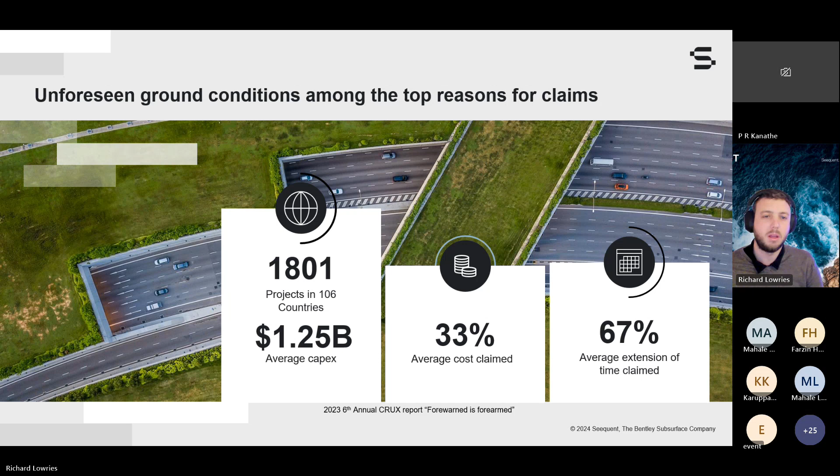The hidden nature of the subsurface and the limited availability of site investigation data, combined with uncertainty of what lies between the data points we do have, is one of the key challenges facing geoprofessionals working on infrastructure projects. Not only do they need to understand the underground and identify ground risks with the limited data they have access to, but they also need to communicate this information to a wide range of different disciplines, both technical and non-technical. All of this is commonly done on tight budgets and timelines.

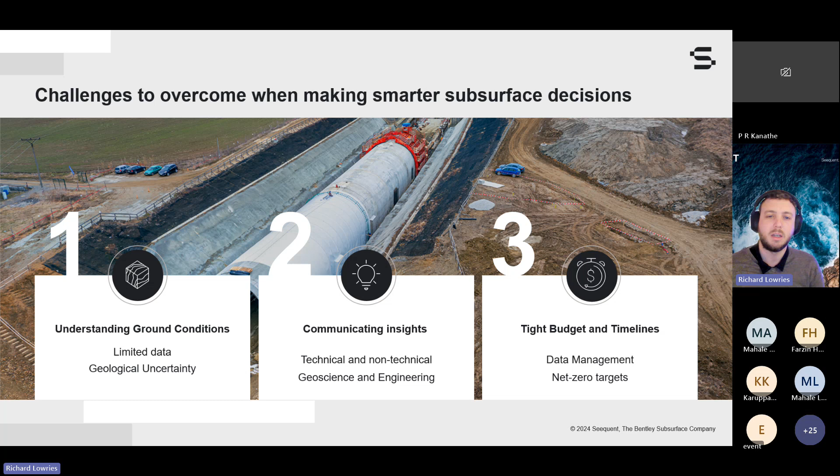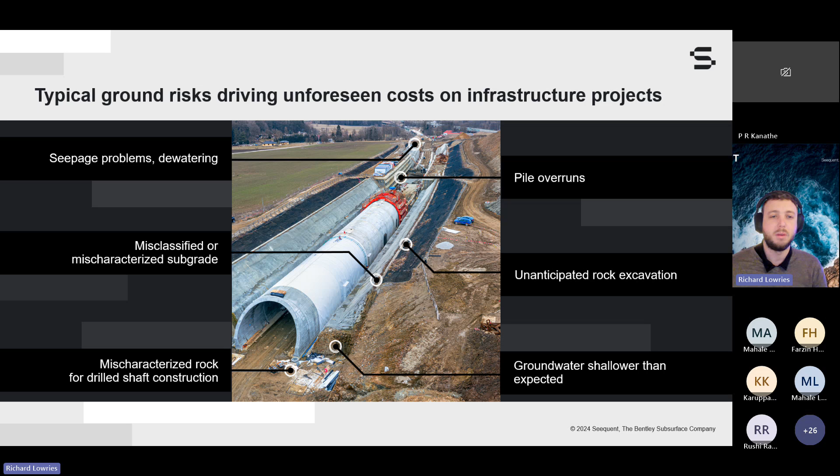I'm sure a lot of you have come across most of these unforeseen costs that occur on infrastructure projects, from seepage problems when we're doing dewatering, pile overruns, misclassified or mischaracterized subgrade, unanticipated rock excavations, and maybe groundwater shallower than expected. And these are typical problems that we commonly come across when we're working on these kinds of projects.

So in today's webinar, we're going to go through 3 sections. The first section is on existing trends. The second section is looking at some case studies that explore some of those existing trends. And the third one is digital technologies that people might want to be using or how they could be embraced. So I'm going to start with existing trends as section 1.

So we're seeing trends of moving towards the adoption of digital technologies. More and more geoscientists and engineers are using technologies regularly across their projects, whether that is through digital collection of site investigation information or through the production of digital drawings. This is helping to increase efficiencies across projects. There's also an increased trend to machine learning and generative AI. This adoption is requiring more and more people to use and manage structured data.

And when we talk about structured data, we mean information that is stored in a structured way and not stored in, say, PDFs or in cross-sections or reports. So if we're looking to continue to extract more and more insights from this information, we cannot continue to break the transfer of digital data between different parties working on projects by only providing PDF reports or only boreholes. This requires an increase in time to work on these projects, to work with this information.

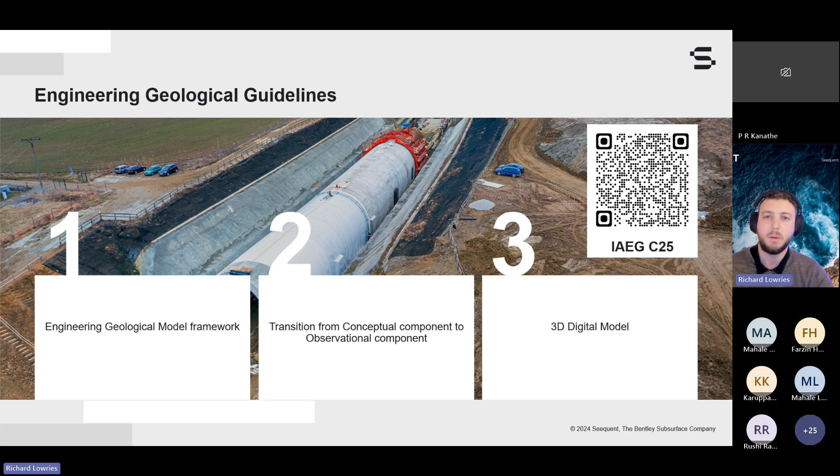I'm going to just quickly apologize because the first video is quite a salesy video. I don't mean it to be a salesy video. It's just got quite an interesting case study. So if it's too salesy, then I understand. But we're trying to keep this talk on a technical level. But I just wanted to raise it before I show it.

But anyway, the high-speed line between Gelnhausen and Fulda, the railway line in Germany, was a project that was run by Professor Quick und Kollegen. It's a high-speed line that will be up to 240 kilometers per hour and will accommodate an expected 30% more passengers by 2030. Two thirds of the approximately 100-kilometer investigated route options run in tunnels. The longest tunnel, between Schultern and Micheltenbach, runs a distance of 9.5 kilometers. There were over 100 boreholes explored, 15 lithological layers created, including quite a complex fault system of 88 fault blocks.

I'm just going to play the video. Let me know if you can't hear it. Richard, sorry to interrupt, but we are not able to hear the audio. You can't hear the audio? No, I can hear it. Yeah, I'm also able to hear it, Richard. Okay. I'm also hearing it. Cool. Well, I'll continue with it, and then I will just talk through what's said on it, just for those that can't hear it.

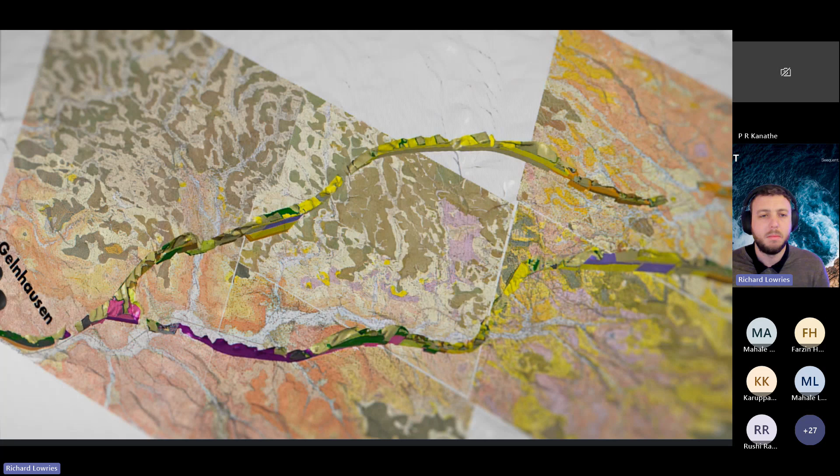This is similar to another project that we have here, and this is the Karavanke Tunnel connecting Slovenia and Austria. It started with an existing single tube tunnel, and that did not meet the demands for the current traffic flow. So a second tube was drilled parallel to the existing one. The length of the new tunnel was approximately 8 kilometers.

This one doesn't have any sound, so I'll talk over it while it plays. This site had some very significant complex geological challenges, and we can see here in the screen in front of us that we have a complex geological map that has been generated for the project area.

And what they're looking to understand on this project is some major water inflow was happening on this project, and trying to identify where that could be as part of the tunneling process. They were also looking to reduce the overbreaks, and there was a risk of methane ingress. Around 25% of the total tunnel route had a risk of high water inflow.

And we can see here we're going to go from a 2D representation of the geology into a 3D geological model. This is built from a combination of data sets. So here we can see we have these big faults. This is built from the geological map and the borehole information that we can see just in the scene as part of the model. So building a representation of those fault planes to help understand where that groundwater ingress would be happening.

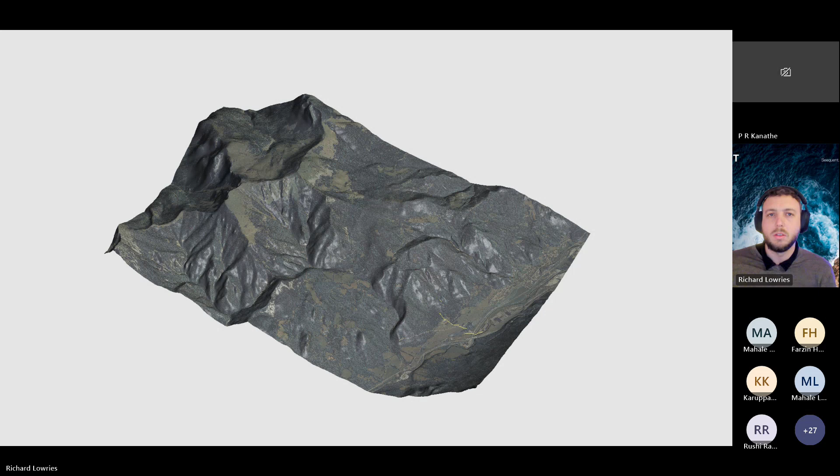So this is another tunnel project, another 3D model. This one is in Auckland. This is City Rail Link, and it's in New Zealand. It's a project by Aurecon. This project is really interesting because the other two were being built during construction. This is for a different phase of the project.

This is for tender. And so this is for the client side, so looking to build a model that communicated the project risk to anyone that was tendering on that project. So for detail, the City Rail Link project is a twin 3.5 kilometer long rail tunnel connecting an existing station to new stations. Also, 2 new stations were going to be added along that route.

It was managed by the City Rail Link, a joint venture between Auckland City Council and central government. The project commenced in 2010 under construction via 6 contracts, and it transverses weak rock of a geological group called the Waitemata and cuts through the Pleistocene alluvial deposits and some really complex volcanic deposits as well.

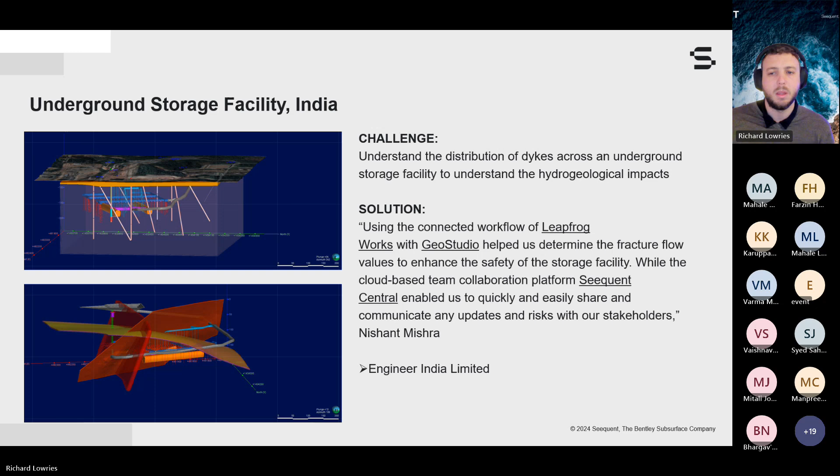For this final case study, I'm just going to hand over to Dr. Farzin Hamidi. Farzin, are you able to take over? Thanks, Richard. Can you hear me? Yeah, I can hear you.

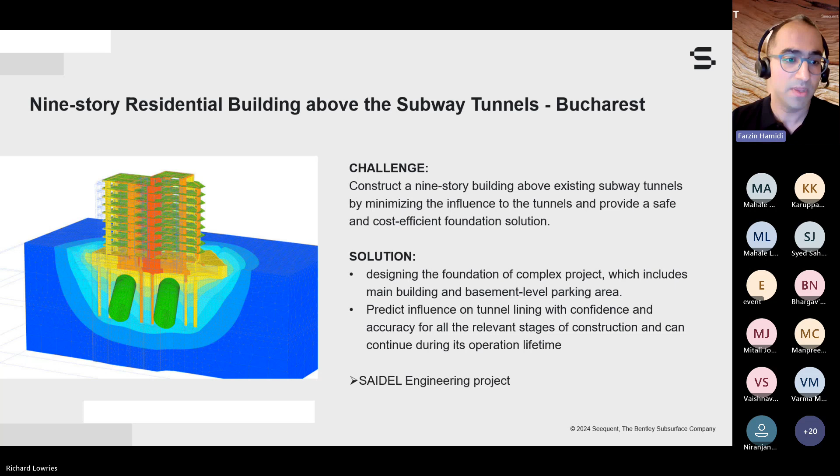And also it helps them to decide to reduce the number of floors, which originally was decided to be a 10-story building; they decided to reduce it to 9 by minimizing the seismic load on the tunnel. And also the reduction of the raft thickness from 2 meters to 1.5 meters, which actually saves them money. So these are all designed in this specific case study, and you can actually find it in this case study. Would you please go to the next slide, Richard, please?

In this section, we will highlight the importance of digital technology. Next, please. File-based exchange and incompatibility or transition of a file format is still a daily issue for many engineering firms. Click next, please. Our own geoscience data report in 2021 revealed that a third of geoengineers are spending over 30% of their time managing data. That adds up to a significant impact on our productivity.

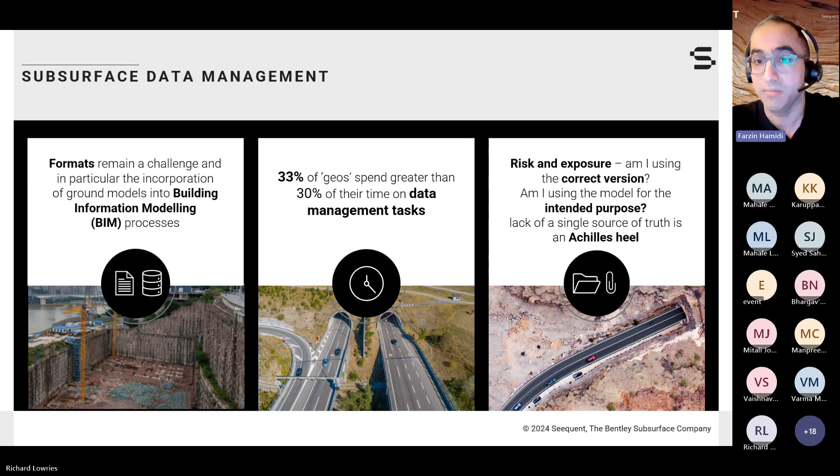But more importantly, perhaps, is the opportunity cost of devoting that time to non-value-add tasks. It leaves less time for what really matters for a geotech engineer. So if you spend, let's say, 30% of your time mainly on file transfer, you spend less time doing whatever you're supposed to do. Ultimately, if you do have challenges, the risks it can open are quite significant, and the cost of getting something wrong when you could have got it right can make or break a project. That's what we're actually thinking within Seequent. Next slide, please.

Ultimately, our vision is to enable more productive and streamlined workflows that connect the people on the project and enable them to collaborate while delivering the pieces of the puzzle that they are responsible for. A centralized and intelligent model with dynamic change management would not only save time by automating deliverable production and preventing rework and delay, but also mitigate the risk from the early stage of design. This fits our ability to execute value engineering opportunities and so add value to infrastructure through a better understanding of ground conditions. Next, please.

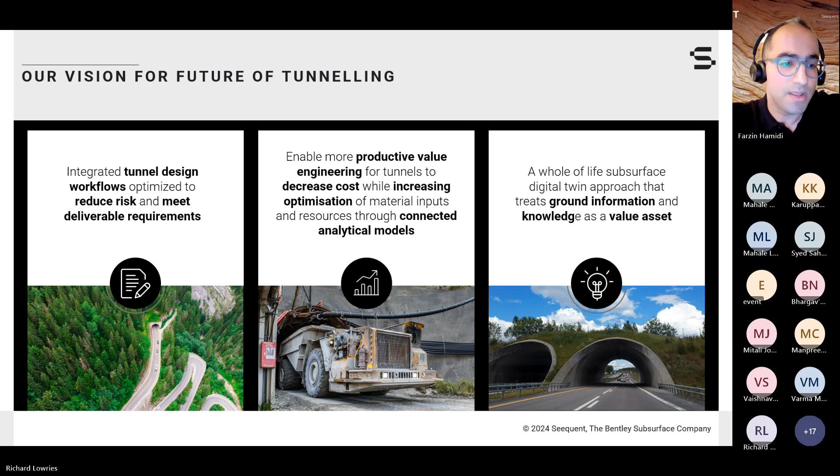Seequent and Bentley are driving toward the future vision by enabling core workflows to be made accessible in an off-the-shelf offering with dynamic geological modeling, cloud data management, integrated BIM tunnel parametric design, and connected analytical models. Next, please. When we start with a 3D approach, it means many things click into place, such as communication and understanding, BIM and clash detection processes, and analysis of complex soil-structure interaction that may present risks to be mitigated or opportunities to be taken.

The subsurface digital twin, while never an exact replica of unforeseen ground conditions, is nonetheless our best understanding, developed at significant cost, and must be treated as a valuable asset to ensure the safety of a project.

Next, please. Seequent is a Bentley subsurface company, and we are all about understanding the underground to build a better world as we collectively advance infrastructure. Next, please.

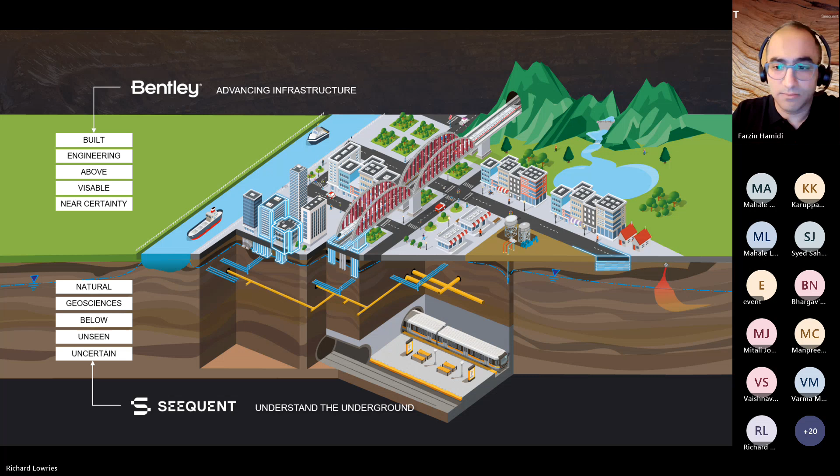So the quick overview of what we can offer within Seequent and Bentley is provided in this infographic map. As you can see, Seequent can offer solutions across the lifespan of a project, from the desk study until the geotechnical analysis, geotechnical modeling, and the monitoring stage of your project. Some of the products that we can offer within Seequent and Bentley you can see from the site investigation stage, which are OpenGround and Imago.

And we do have geophysical packages such as AGS and Oasis Montaj for doing geophysical analysis within the site investigation data that we have available, so we can make more informed and more insightful decisions. And then we can push them all into the 3D geological modeling tools that we have available, as Richard showed earlier in Leapfrog.

Central is our model management tool where you can publish all your models and visualize them in a web browser, or you can share them with your client or whoever wants to see them in a web browser. So we can see those 3D geological models that Richard mentioned earlier. You can share them with other team members around the globe and collaborate. It also has version control that can help you have a history of your project.

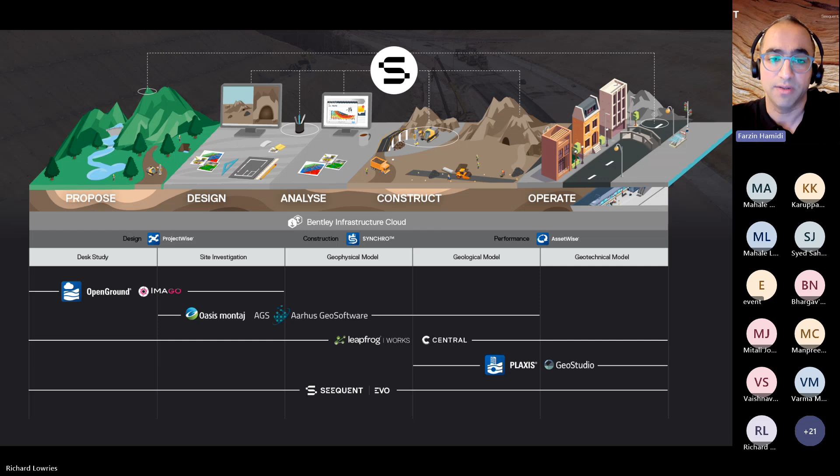And then once you're done with your Leapfrog model, you can push it as a 2D section into your geotechnical analysis packages, which are PLAXIS and GeoStudio, or you can bring the 3D geological model into Slope3D and run the limit equilibrium stability analysis within GeoStudio.

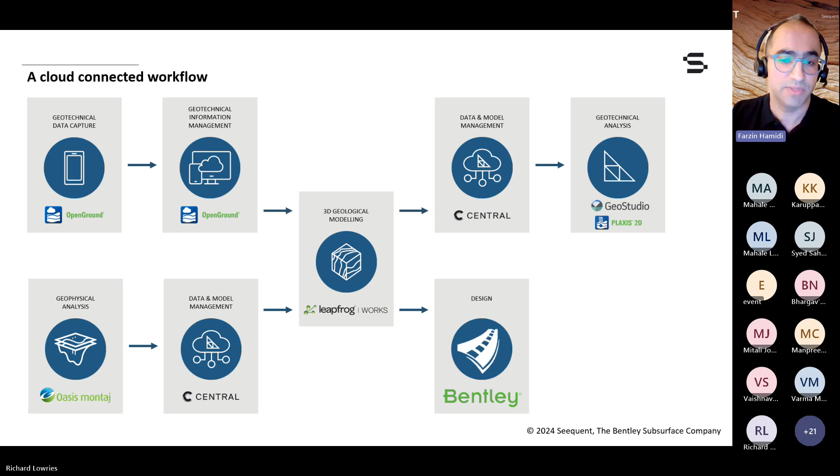Everything that you can see in this workflow is dynamically connected. So all these products that you can see in this map are dynamically connected. It means that if you have any information added at any stage of the project, it will be automatically updated due to the implicit way of modeling in Leapfrog. So it's not only that the products are working together, but mainly I want to show that it is cloud-based and you can call them wherever you want from different products, and there is a connection between these products. Next, please.

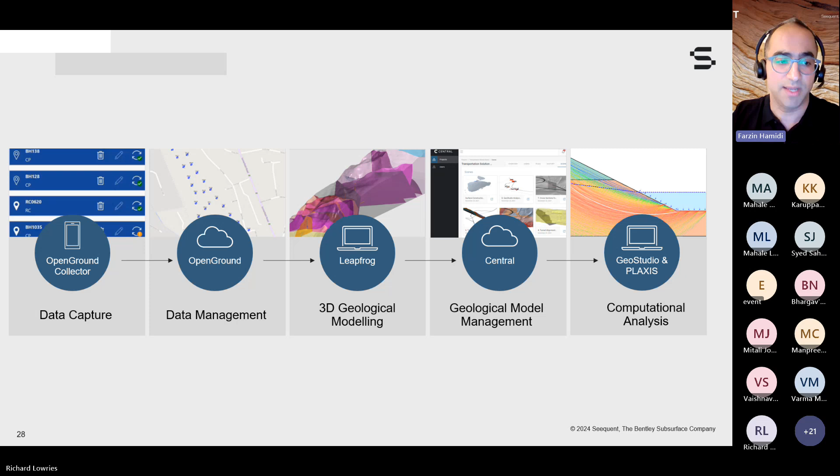So the connected workflow allows an easy transfer of data between desktop, mobile, and cloud-based software solutions. There are five key benefits of a connected workflow using cloud technology: cloud storage, time efficiency, synchronization, data management, and notification. I will discuss each of these in a bit more detail in the upcoming slides. Next, please, Richard.

So we have data from the site investigation stage. We have the OpenGround Collector app. As you can see, we can use the collector app and take it on site. We can use it offline and collect our information. Once we get back to the network area, we can upload it to cloud storage. And then next, please.

This is our data management tool, which is in the cloud. So once our site engineer uploads the data, you as an office engineer can see in real time what is available on that site. If you want to comment and convey a message to your site engineer, you can simply do it, or you can come to these model management tools and correct the site investigation.

It has a lot of capability. You can report all these site investigations into Power BI reports, or you can see them in a live view, as you can see on the right side of the screen. You can see the borehole logging information, and you can correct it as you go.

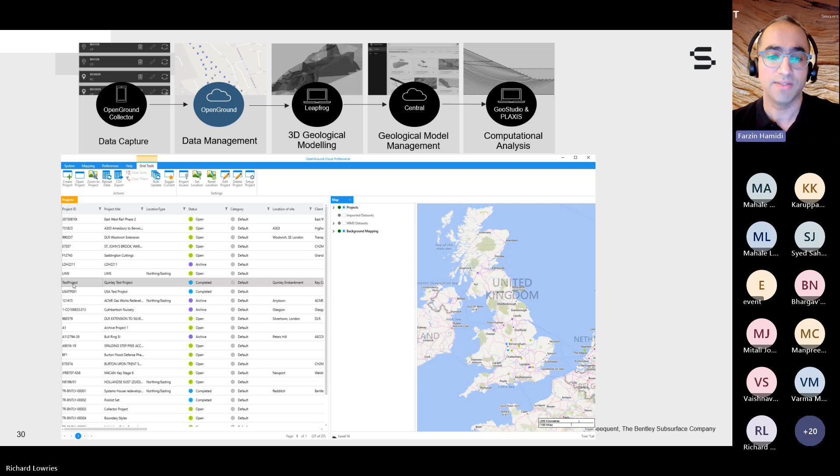Next, please, Richard. Once you're done with your site investigation, as Richard showed you earlier, you can bring all the borehole information into the geological modeling. It could be CPT data, geophysical data, or face mapping data to make your geological model much richer and more up to date.

For example, in this project, once they had done the site investigation, they missed the fault zone that you can see here. From the geophysical information, they realized that there is a fault zone, so they changed the tunnel alignment accordingly in order to make it much more secure.

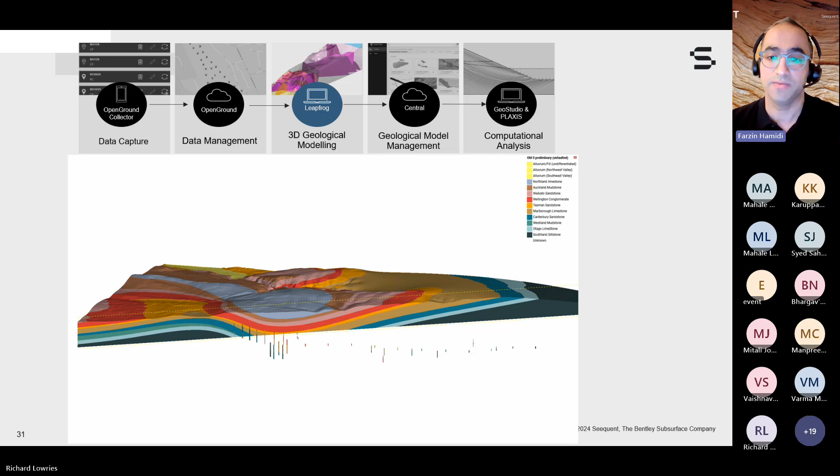And as you can see, this geological model can be updated with the design, and you can actually add cross-sections into this and export those cross-sections and bring them in as a report, or you can use them in your subsequent geotechnical analysis and run the geotechnical analysis within GeoStudio or Plaxis. Also, as you can see, you can actually run a longitudinal cross-section, which is shown in the case study that Richard showed you earlier. Next, please.

So this is a quick overview of our Central. So you do have a project which has a branch ID and a version, and it has a quick overview of who made changes to the project and what comments were available in this specific Central instance.

You can actually travel through the history. You can download the Leapfrog model, and you can see who collaborated in this and what comments were made, and who actually put the comments specifically in that history, in that timeline of your project. Next, please.

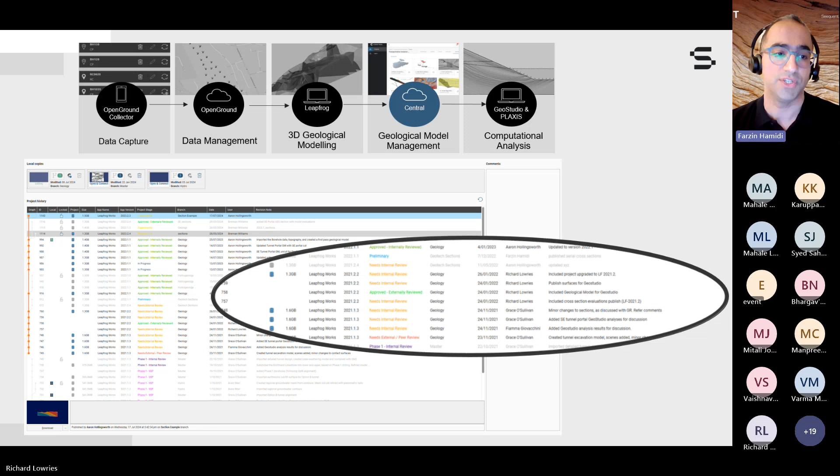And once you're done via your Central, you do have a live and dynamic connection to your geotechnical analysis package. In this case, this is the GeoStudio overview, and it's Slope 3D. You can see I brought the tunnel portal cross-section into this view, and you can see the geological model with the same coloring brought into GeoStudio, and you can run the slope stability analysis for that tunnel portal.

And if there is any specific information, you can see everything is updated accordingly. And you can do it both in 2D and 3D. If there are any updates, you can see, here substantially exaggerating the geometry, it's updated. You can come back, and instead of redoing the same project, you just reload it into GeoStudio. You don't need to recreate the project.

Everything can be updated, and you can clone the analysis and run the same simulation with the updated geological model. So as you can see in this screen, all the 2D and 3D cross-sections are updated accordingly, based on new information provided in Leapfrog. Next, please.

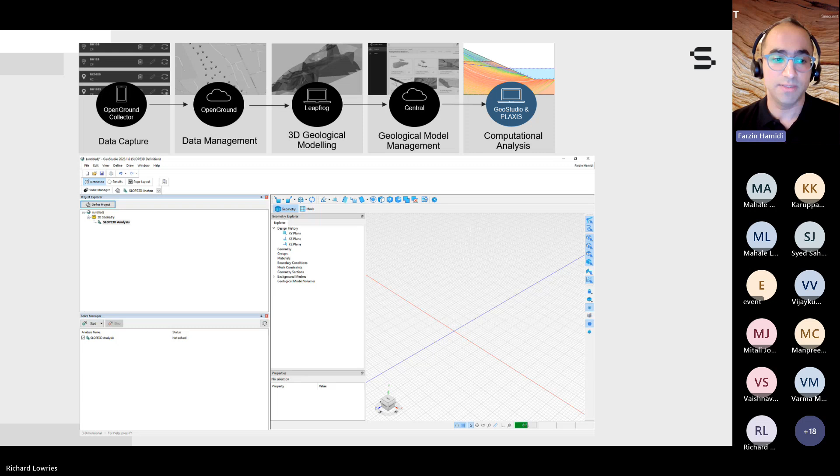So basically, as you can see here, we already discussed the main advantage of the productivity improvement with integrated BIM modeling, and the heart of this holistic workflow that incorporates ground modeling with Leapfrog and geotechnical analysis with Plaxis. We would like to expand your horizon beyond the design phase into asset management and operation through iTwin digital as well as OpenTunnel. So next, please, Richard.

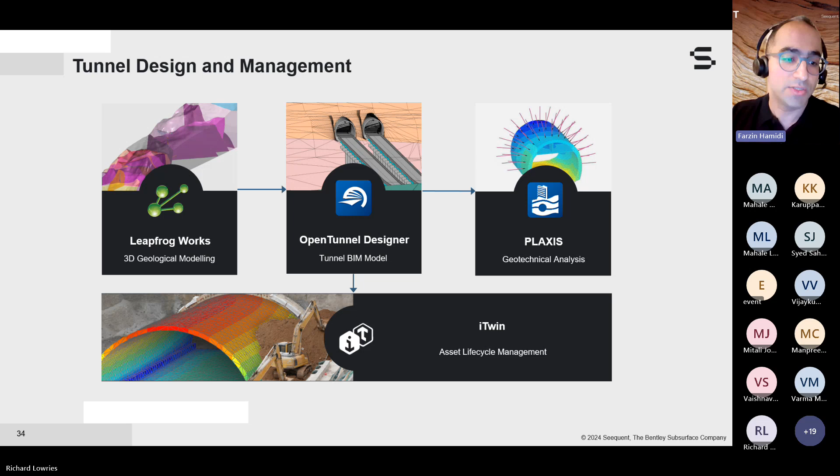So in this view, we show how the various Bentley and Seequent products fit together within the workflow. It's worth noting that applying digital innovation in any of these areas is going to be valuable. But it is when you start to connect them together that you get the largest benefit of this improvement. It is being able to move easily between the steps that will have the biggest impact on your productivity.

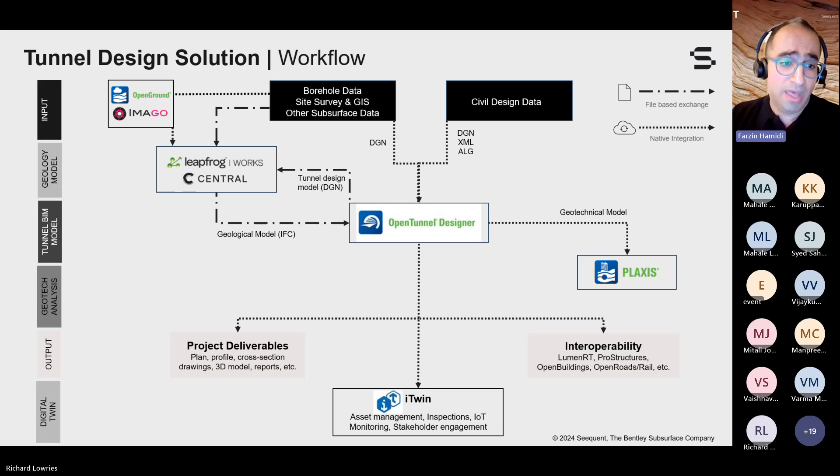And with that said, I'm going to show you a quick video of OpenTunnel Designer into Plaxis. As you can see here, we have OpenTunnel Designer, which is specifically used for designing the reinforcements and the profile of your support system. So you can upgrade everything in this profile. You can import and update them, changing the alignment by just importing the alignment polylines, and everything, as you can see here, can be changed, and all the designs can be associated specifically to different chainages of this project.

For example, you decide, okay, I would like to add this specific design for my portal, and the portal design of my reinforcements differs from what I have in the middle of that chainage. So you are able to do it accordingly, as you can see in the view. And then once you're done, you can simply come back to the project and export it accordingly.

The other thing you can do is bring your geological model into the view. As you can see here, we are bringing a different scenario for adding the cross sections. These are the cross sections added at each specific location, so you can see them in view. Also, as I mentioned earlier, you can bring the geological model seamlessly from Leapfrog into OpenTunnel Designer. So this is the tunnel portal, and you can see the geological model and the support system associated with that geological model for each specific chainage.